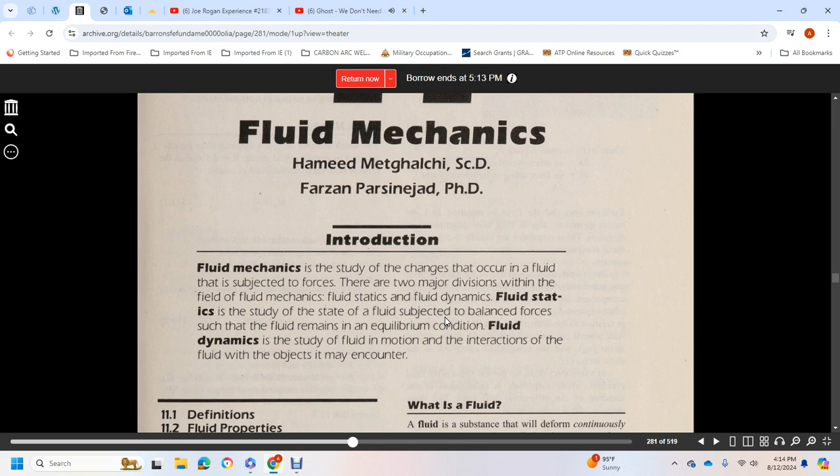Fluid mechanics is the study of changes that occur in fluid subject to forces. There are two major divisions within the field of fluid mechanics: fluid statics and fluid dynamics. Fluid statics is the state of fluid subject to balanced forces such that the fluid remains in equilibrium. Fluid dynamics is the study of the motion and interactions of fluid with objects it may encounter.

Definitions covered include fluid properties, fluid statics, fluid dynamics, internal flow, external flow devices, fluid measurement, dimensional analysis, dimensional homogeneity, similitude, and a summary. As with any other field of study, fluid mechanics has a vocabulary and terms that must be understood before the basic principles are introduced.

What is a fluid? A fluid deforms constantly when shear stress is applied, no matter how small the shear stress is. A fluid is a substance in either the liquid form or the vapor phase.

Control volume: all principles of fluid mechanics define the relation with the control volume, an imaginary region in space defined by boundaries, stationary or moving, across which material may cross. The boundaries of the control volume are completely arbitrary, and when possible, they are chosen in a way that simplifies the analysis.

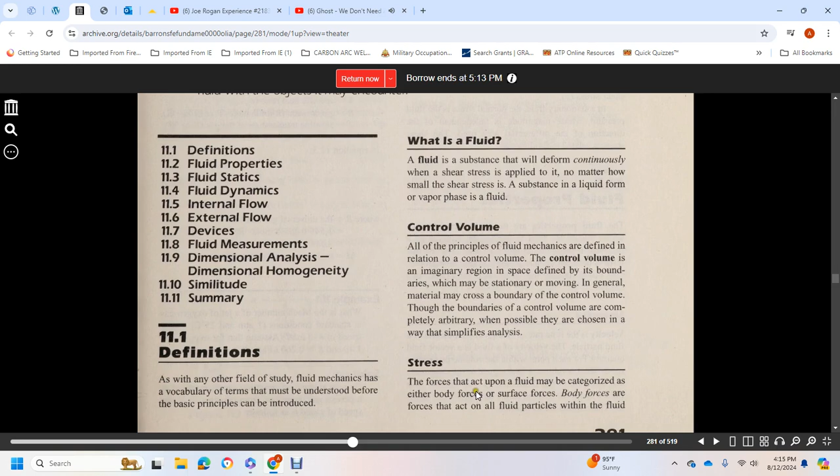Stress: the forces that act upon a fluid may be categorized are either body forces or surface forces. Body forces act on all fluid within the fluid and occur without physical contact, including electromagnetic and gravitational forces. Surface forces are forces applied directly to the surface of the liquid through physical contact.

The total force per unit area acting on the fluid at any point in the volume is an important parameter given the name stress. Stress at point P is defined as the limit as delta A approaches zero of the resultant force acting on the infinitesimal area at point P, divided by that infinitesimal area.

Both area and force in this equation are vector quantities; they have magnitude and direction, expressed with three components with respect to the same coordinate system. In general, to describe the stress of a fluid at any point with respect to the coordinate system, nine components are required.

Stress is often expressed in terms of two vector components in relation to the differential area: the component normal or perpendicular to the area is the normal stress, and the component along the differential area is the shear stress. In a stationary fluid, the normal stress is the fluid pressure, with magnitude independent of the direction of the differential area, while shear stress is related to fluid motion.

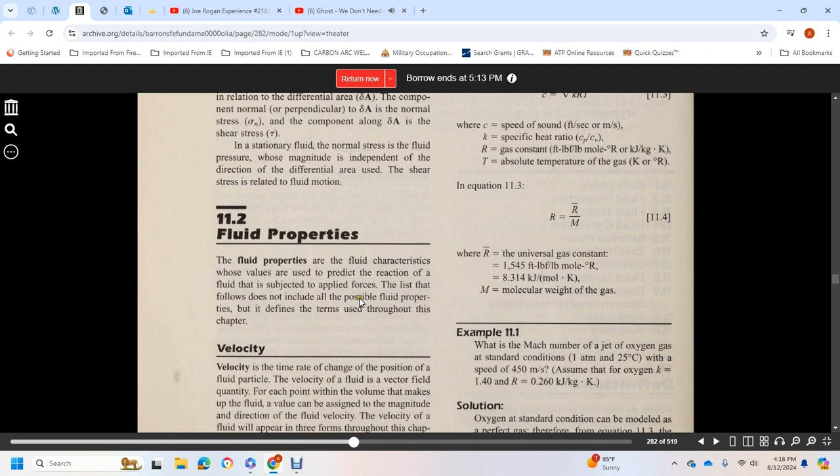Section 11.2, Fluid Properties. Fluid properties are fluid characteristics whose values are predictive of the reaction of the fluid subject to applied forces. The following list does not include all possible fluid properties, but defines the terms used throughout this chapter.

Velocity is the time rate of change of the position of a fluid particle. The velocity of the fluid is a vector field quantity, assigned at each point within the volume of fluid, with magnitude and direction of the fluid velocity. The velocity of the fluid will appear in three forms throughout the chapter.

These forms are as follows: velocity, the vector quantity of fluid velocity given at a point of the fluid, having both magnitude and direction; speed, the magnitude of the velocity vector given at a point of the fluid; and average speed, V, the average fluid speed through the surface of the control volume.

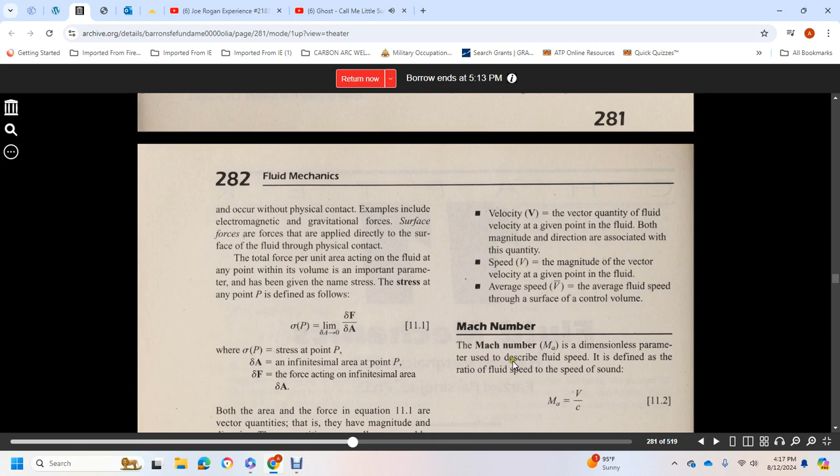The Mach number is a dimensionless parameter that describes fluid speed, defined as the ratio of fluid speed to the speed of sound. Mach number equals the fluid speed in feet per second or meters per second, divided by the speed of sound in feet per second or meters per second.

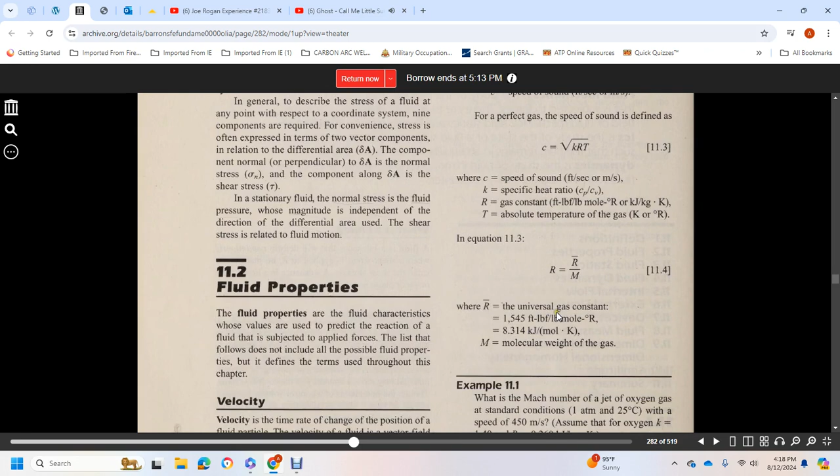The speed of sound for a perfect gas is defined as the square root of the specific heat ratio times the gas constant times the absolute temperature of the gas. In this equation, R is equal to the universal gas constant divided by the molecular weight of the gas.

Acceleration is defined, and it shows acceleration as the time rate of change of velocity of a fluid particle. Acceleration is also a vector fluid quantity and can change with either magnitude or direction of velocity.

There are two reference values of pressure. The gauge pressure is defined by reference to atmospheric pressure, while the absolute pressure is defined by reference to zero pressure. The two values are related by the equation: absolute pressure equals gauge pressure plus atmospheric pressure.

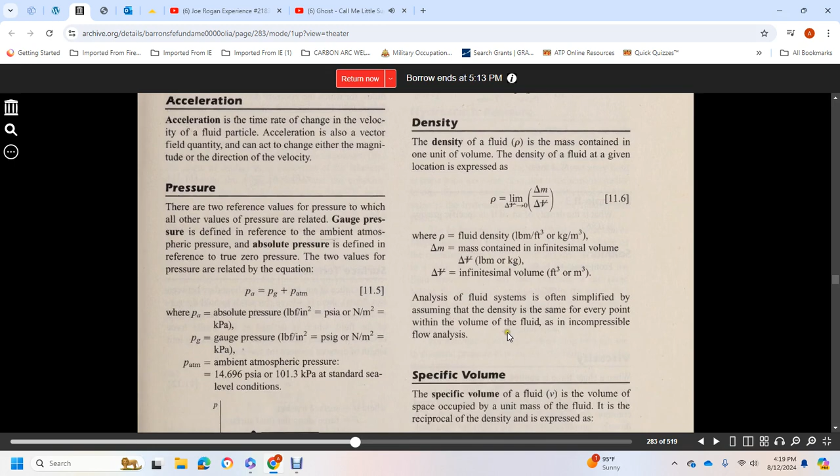Density is the mass contained within one unit volume of the fluid. Fluid density is given as the limiting value of mass per unit volume as the volume approaches zero, in units of pounds per cubic foot or kilograms per cubic meter. When analyzing a fluid system, it is often assumed that density is the same at every point within the volume, as in incompressible flow analysis.

Specific volume of a fluid is the volume of space occupied by a unit mass of the fluid. It is the reciprocal of the density: specific volume equals 1 over density (rho).

Specific weight is defined as the weight of a unit volume of the fluid, related to density. Specific weight equals density times the acceleration due to gravity, at sea level.

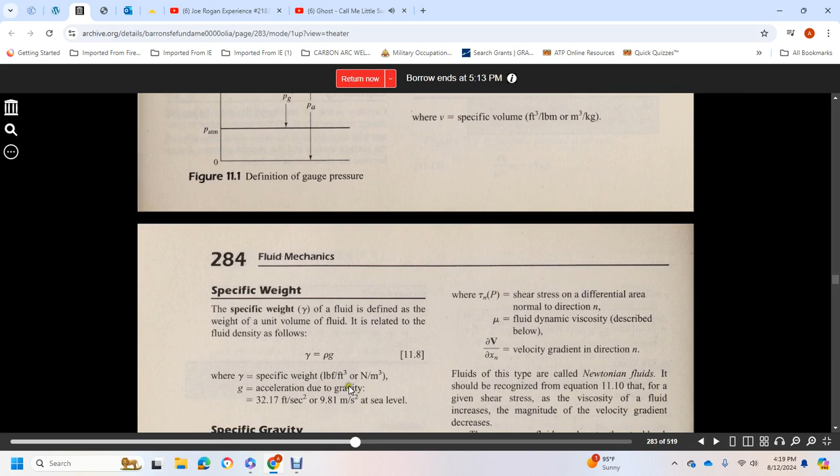Specific gravity is a dimensionless expression of the density of a fluid, defined as the ratio of fluid density to the density of water at 4 degrees Celsius. Specific gravity equals the density of the fluid over the density of water, and is also equal to the specific weight of the fluid over the specific weight of water.

Viscosity: when a shear force is applied, fluid motion will occur, with the magnitude of fluid velocity related to the magnitude of shear stress for most common fluids. The shear stress within the fluid is directly proportional to the velocity gradient. Viscosity is the name given to this proportionality constant.

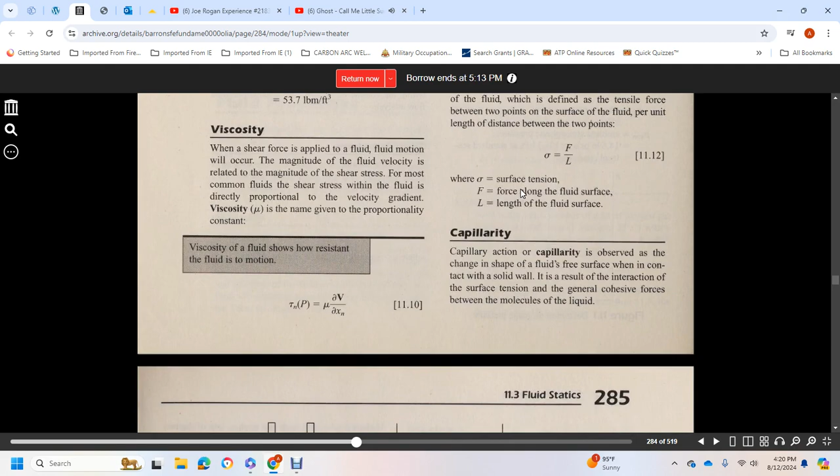Viscosity shows how resistant a fluid is to motion. Shear stress, the differential over the normal direction, is equal to the fluid's dynamic viscosity times the velocity gradient in the normal direction n.

Fluids that follow this relationship are called Newtonian fluids, and this should be recognized per equation 11-10: for a given shear stress, the viscosity of the fluid increases as the magnitude of the velocity gradient decreases.

There are many fluids such as toothpaste, blood that cannot be classified as Newtonian fluids. For many non-Newtonian fluids, the shear stress is related to the velocity gradient by a power law relationship. Two examples of such non-Newtonian fluids are pseudoplastic fluids, for which viscosity decreases as the velocity gradient increases, and dilatant fluids, for which viscosity also increases as the velocity gradient increases, following the power law for non-Newtonian fluids.

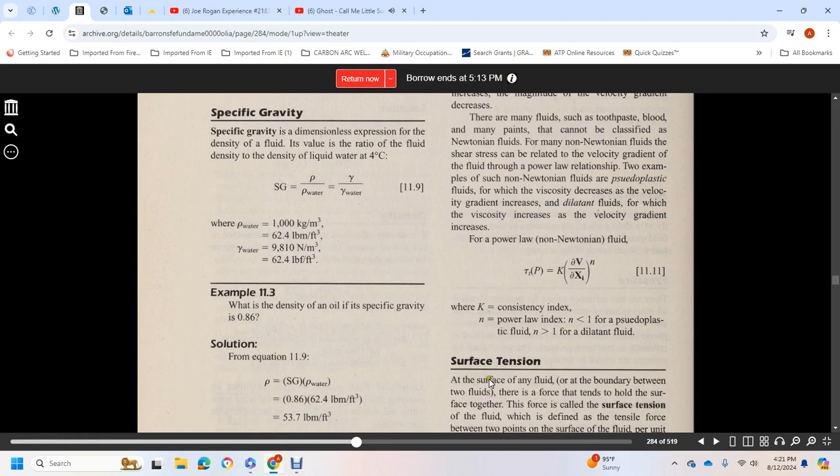The shear stress differential in the normal direction is equal to K, the consistency index, times velocity gradient raised to the nth power.

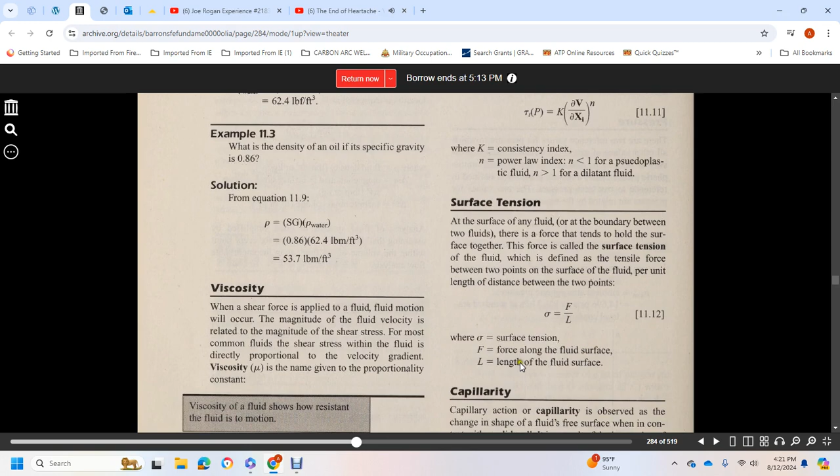Surface tension: at the free surface of a fluid, or at a boundary between two fluids, there is a force that tends to hold the surface together. This force is called surface tension, defined as the tensile force between two points on the fluid surface per unit length over the distance between those two points. Surface tension equals the force along the fluid surface over the length of the fluid surface.

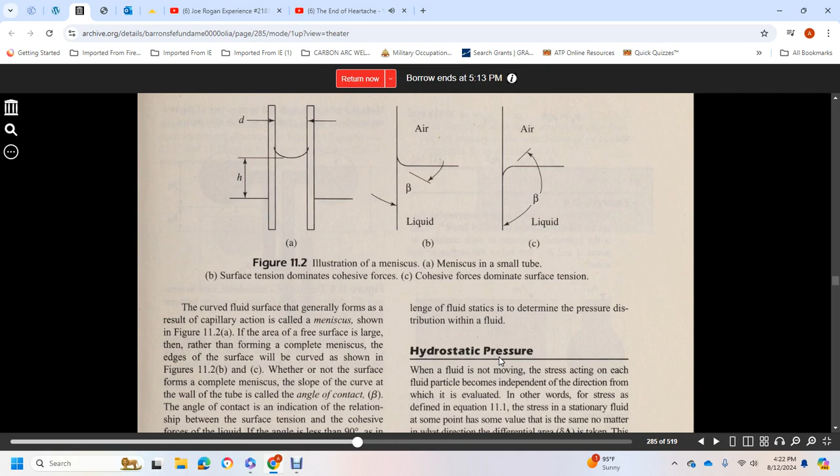Capillary action, or capillarity, is observed as a change in the shape of a fluid's free surface in contact with a solid wall. It results from the interaction of surface tension with the cohesive forces between the molecules of the liquid. The curved fluid surface that generally forms as a result of capillary action is called a meniscus, shown in figure 11.2a. Where the area of the free surface is larger, rather than forming a complete meniscus, the edge of the surface will curve, as shown in figure 11.2b and c. Whether or not a complete meniscus forms, the slope of the curve at the wall of the tube is described by the contact angle.

Contact angle indicates the relationship between surface tension and cohesion force of the liquid. With angle less than 90 degrees, as in figure 11.2b, surface tension is stronger than cohesion forces. With angle greater than 90 degrees, as in figure 11.2c, cohesive forces are stronger than surface tension.

When a small diameter tube is placed in fluid where surface tension is stronger than the molecular cohesive force, the fluid level inside the tube will rise a certain distance, as shown in figure 11.2a.

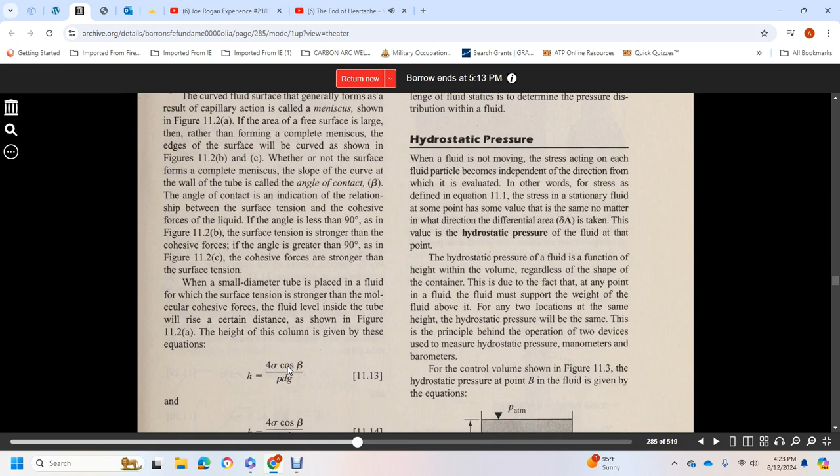The height of the column is given by the equation: height equals 4 times sigma over gamma times D, with H and D as variables.

Section 11.3, Fluid statics. Fluid static is a state of a fluid system with no fluid motion and no shear stress. The primary challenge in fluid statics is to determine the pressure distribution within the fluid.

Hydrostatic pressure: when fluid is not moving, the stress acting on each fluid particle becomes independent of direction, which is called the hydrostatic pressure. This stress is defined in equation 11.1 as stationary fluid pressure at the same point having the same value no matter what direction the differential area is taken.

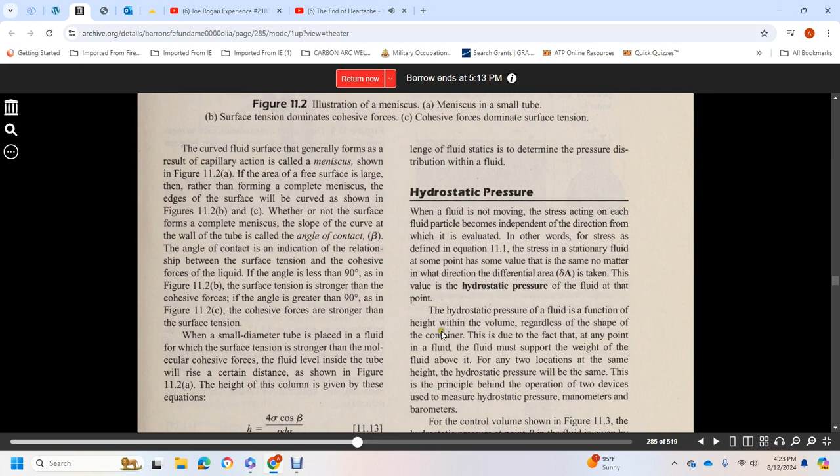The value of the hydrostatic pressure of the fluid at a point is a function of the height of fluid, regardless of the shape of the container, due to the fact that any point in the fluid must support the weight of the fluid above it.

For any two locations at the same height, the hydrostatic pressure will be the same. This is the principle behind the operation of two devices using hydrostatic pressure: manometers and barometers.

For the control volume shown in figure 11.3, the hydrostatic pressure at point B of the fluid is given by these equations.

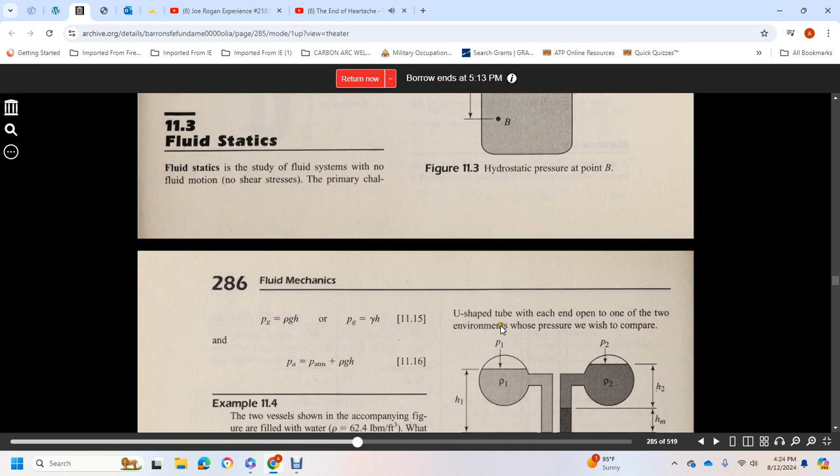The manometer, illustrated in figure 11.4, is a device used to measure pressure difference. It is constructed U-shaped with each end open to the two environments whose pressures we want to compare. The difference in pressure between the two environments is related to the difference in height between the two legs of the manometer, as follows.

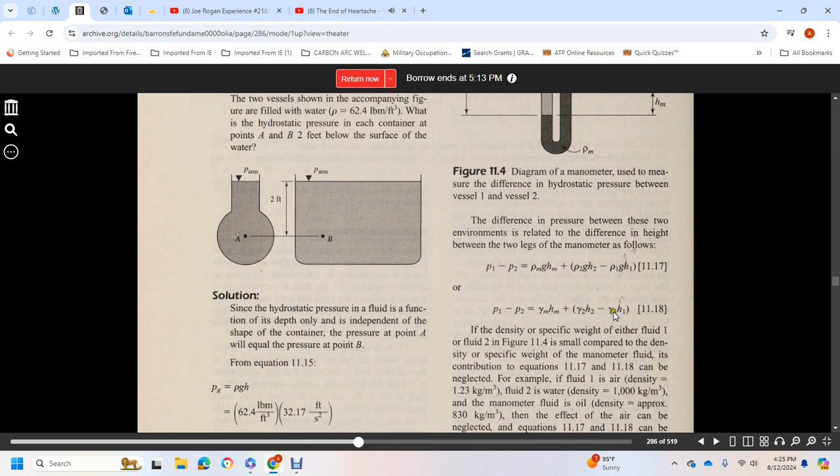If the density or specific weight of either fluid 1 or fluid 2 in figure 11.4 is small compared with the density or specific weight of the manometer fluid, the contribution of that term in equations 11.17 and 11.18 can be neglected.

For example, if fluid 1 is air with density 1.23 kilograms per meter cubed, fluid 2 is water with density 1,000 kilograms per meter cubed, and the manometer fluid is oil with density approximately 830 kilograms per meter cubed, the effect of the air can be neglected, and equations 11.17 and 11.18 can be reduced.

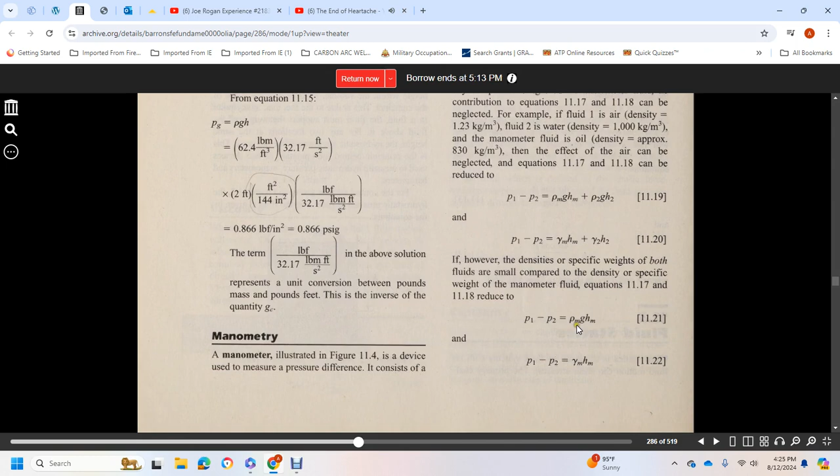If the density or specific weights of both fluids are small compared to the density or specific weight of the manometer fluid, equations 11.17 and 11.18 reduce to P1 minus P2 equals rho_M g H_M, and P1 minus P2 equals gamma_M H_M, with one end of the manometer exposed directly to the atmosphere, making it an open manometer.

This is illustrated in figure 11.5, and equations 11.17 and 11.18 apply to the open manometer, where pressure 1 is related to atmospheric pressure.

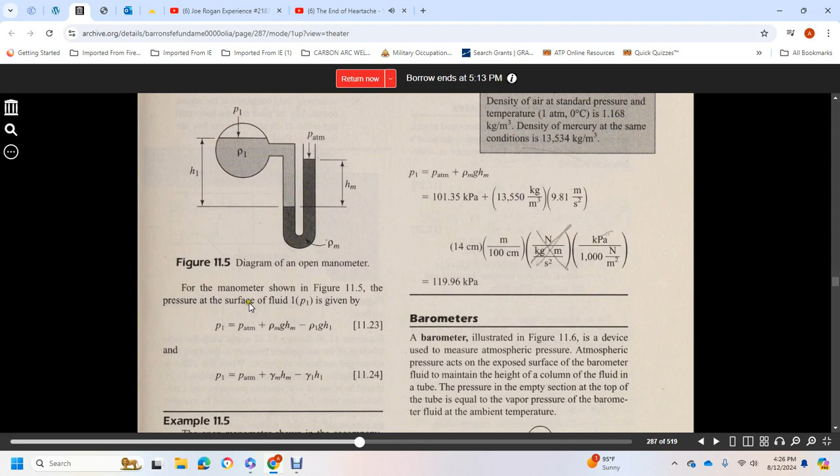For the manometer shown in figure 11.5, with the pressure on the surface of the liquid, P1 is given. We then consider the density of air at standard pressure and temperature, 1 atm at 0 degrees Celsius, which is 1.168 kilograms per meter cubed, and the density of mercury at the same condition.

13,534 kilograms per meter cubed. Barometers: the barometer, illustrated in figure 11.6, is a device used to measure atmospheric pressure.

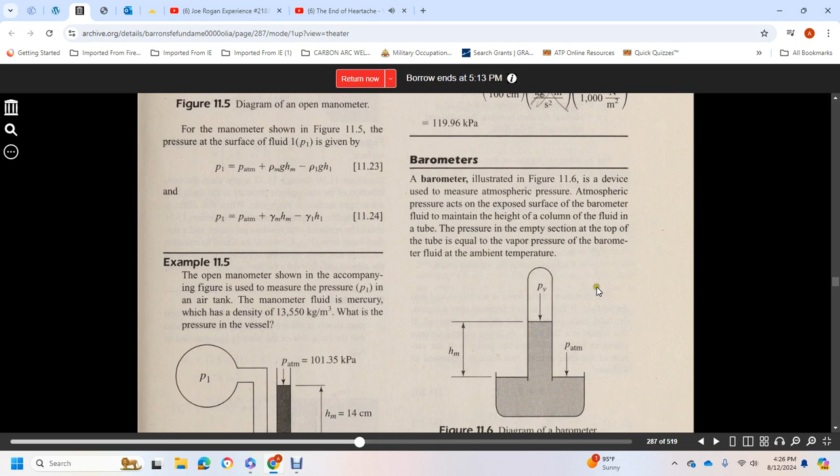The atmospheric pressure acts on the exposed surface of the barometer fluid, maintaining the height of the fluid column in the tube. The pressure in the empty section at the top of the tube is equal to the vapor pressure of the barometer fluid at ambient temperature.

The height of the fluid column related to the atmospheric pressure is given by: atmospheric pressure minus vapor pressure equals gamma H_M, where PV is the vapor pressure of the barometer fluid. With the ambient temperature, the vapor pressure of the barometer fluid is usually chosen close to 0.

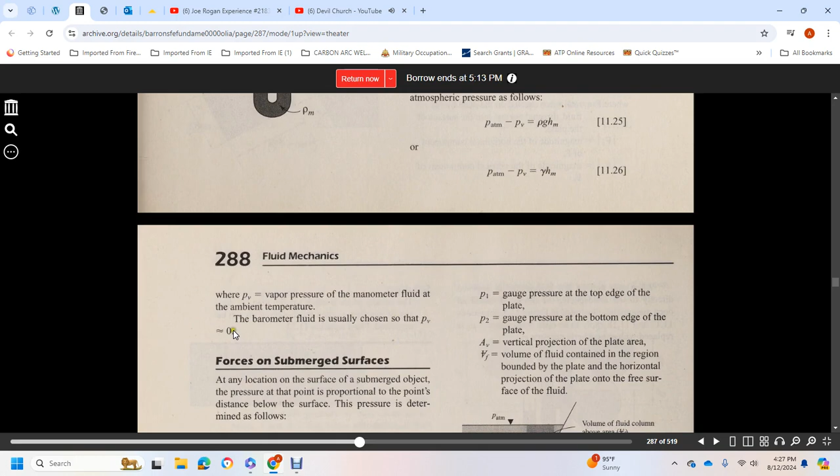Forces on submerged surfaces: at any location on the surface of a submerged object, the pressure at a point is proportional to the distance from the surface, with pressure determined as P equals P0 plus rho g times that distance.

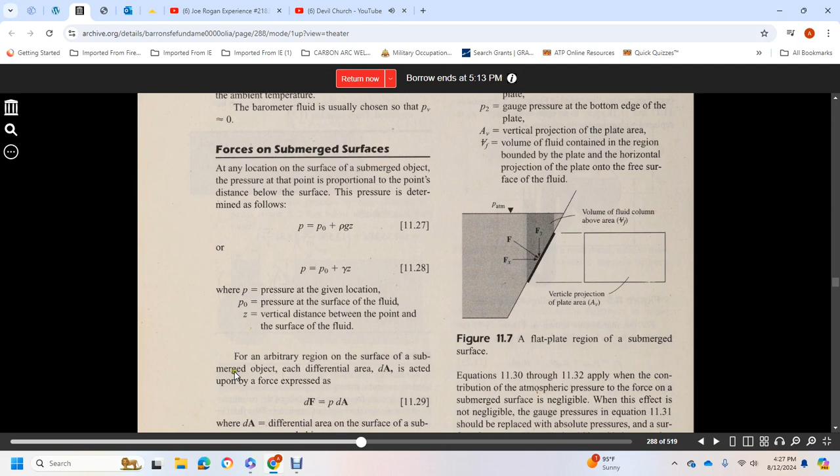The force acting on the differential area of the submerged object is equal to the fluid pressure at the location of that differential surface area. The direction of the force is normal to the surface, integrated over the region, gives the total force acting over the region, as shown for a flat plate control volume in Figure 11.7.

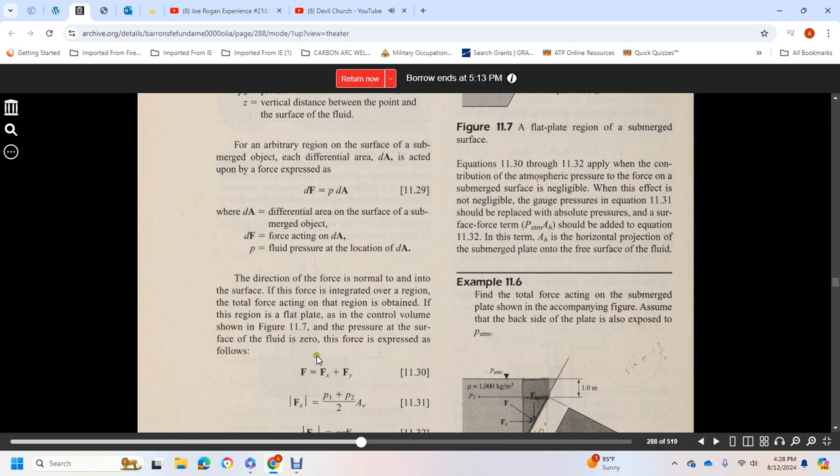Equations 11.30 and 11.32 apply when the contribution of atmospheric pressure forces on the submerged surface is negligible. If the effect is not negligible, the gauge pressure in equation 11.31 should be replaced with absolute pressure, and an atmospheric surface force term should be added to equation 11.32.

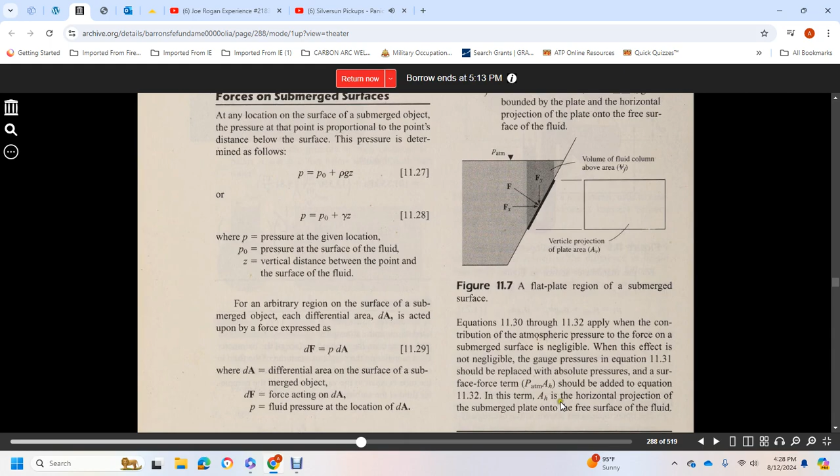The term A H is the horizontal projection of the submerged plate relative to the free surface of the fluid, and it factors into the solution. Note that the pressure increases linearly with depth.

The center of pressure is the location on the surface of a submerged rigid body where the concentrated point force F, from the preceding section, has the same effect as the distributed pressure force over the entire region. These definitions are illustrated in Figure 11.8.

The coordinates of the center of pressure relative to the centroid of the submerged area, Y and Z, are given by the following equations. Y is equal to the moment of the area about the axis parallel to the y-axis passing through the centroid of the area.

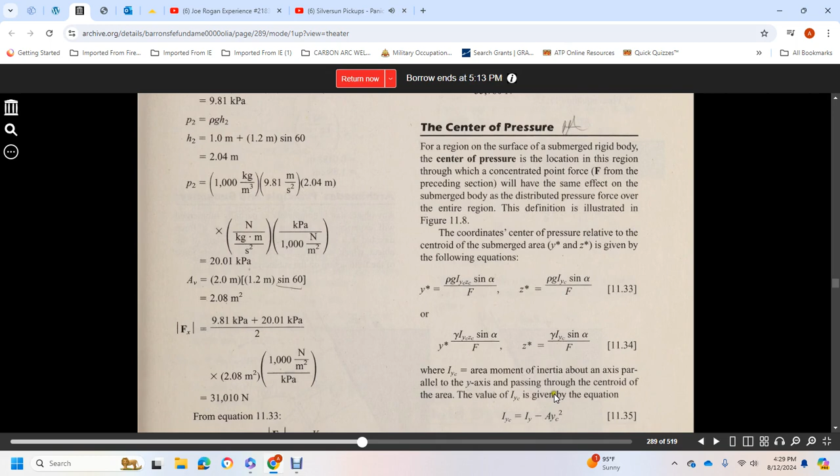The value Iyc is given by the parallel axis theorem in equations 11.33 and 11.34, representing the area product with the axis parallel to the y and z axes passing through the centroid of the area.

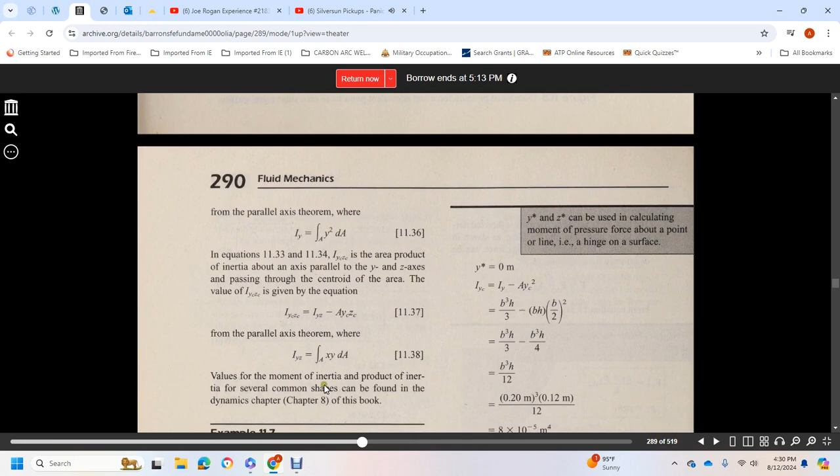The moment of area about an axis parallel to it, given by the parallel axis theorem, along with moments of inertia for several common shapes, can be found in the dynamics chapter, chapter 8, of this book. The text then proceeds into examples.

Y and Z can be used to compute the moment of the pressure force about a point or a line hinge on a surface.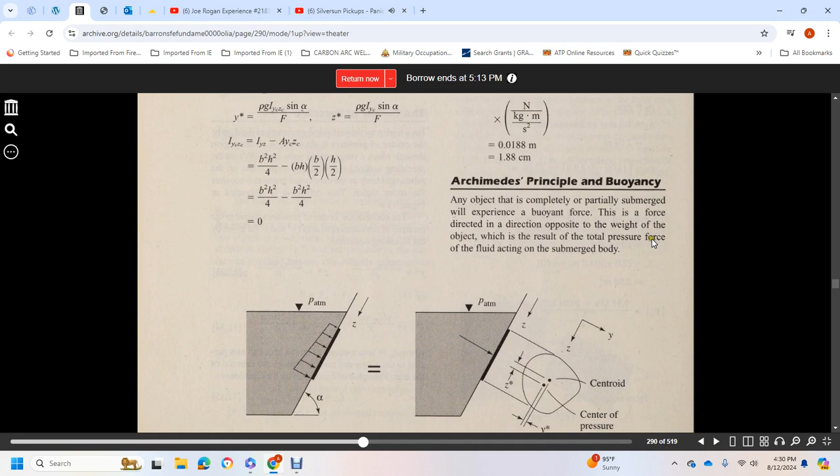Archimedes' principle of buoyancy states that any object completely or partially submerged will experience a buoyancy force, directed opposite to the weight of the object, which results from the total pressure force of the fluid acting on the submerged body. According to Archimedes' principle, the magnitude of the buoyancy force is equal to the weight of the fluid displaced by the object.

If the object is floating on the surface of the liquid, it will displace a volume of fluid with the same weight as the object.

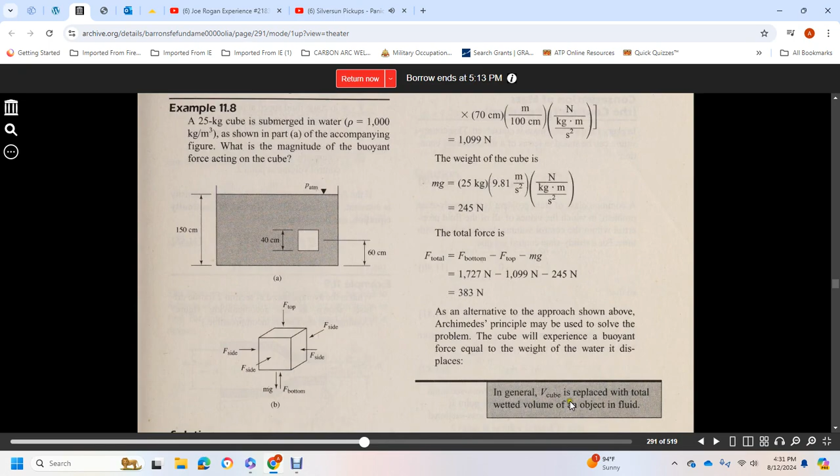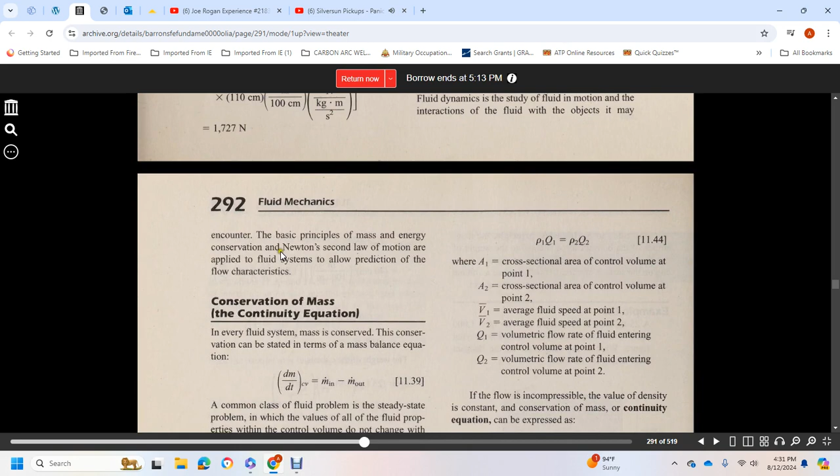Section 11.4: Fluid Dynamics. Fluid dynamics is the study of fluid motion as it interacts with objects it may encounter, based on the principles of mass and energy conservation. Newton's second law of motion applied to fluid systems allows for the prediction of fluid characteristics.

Conservation of mass and the continuity equation: for every fluid system, mass is conserved, and this conservation is stated in terms of the mass equation as dm over dt of the control volume equals mass in minus mass out.

A common class of fluid problems involves steady state conditions, where values of fluid properties within the control volume do not change over time.

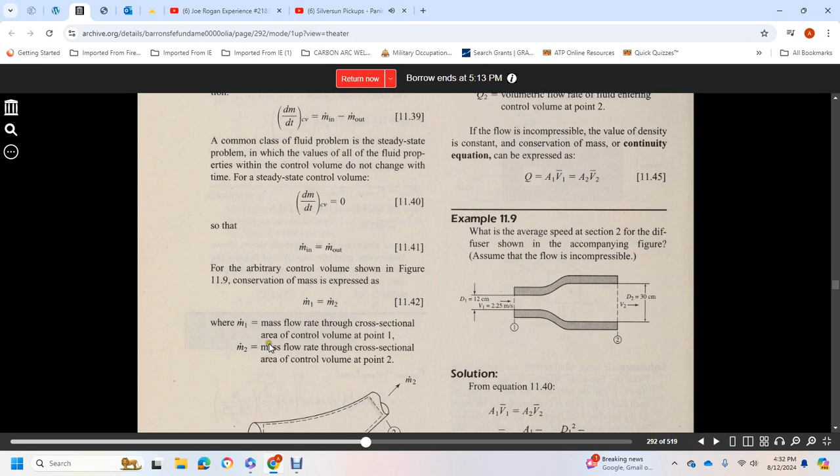Mass over time for the control volume is equal to 0, so mass in equals mass out. For the arbitrary control volume shown in figure 11.9, conservation of mass gives mass 1 equal to mass 2, where mass 1 is the mass flow rate at the cross-sectional area of control volume point 1, and mass 2 is the mass flow rate at the cross-sectional area of control volume point 2.

Equivalent expressions from equation 11.42 show rho1 A1 V1 equal to rho2 A2 V2, where A1 is the cross-sectional area, and rho1 Q1 equal to rho2 Q2. A1 is the cross-sectional area of control volume point 1, A2 is the cross-sectional area of control volume point 2, V1 is the average fluid speed at point 1, V2 is the average fluid speed at point 2, and Q1, Q2 are the volumetric flow rates of the fluid entering points 1 and 2.

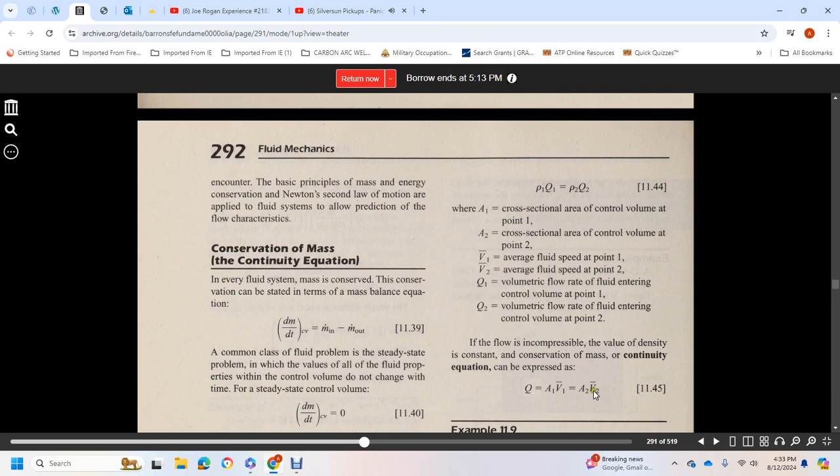The impulse momentum principle: Newton's second law, force equals mass times acceleration, can be applied to fluid systems with the principle known as the impulse momentum principle.

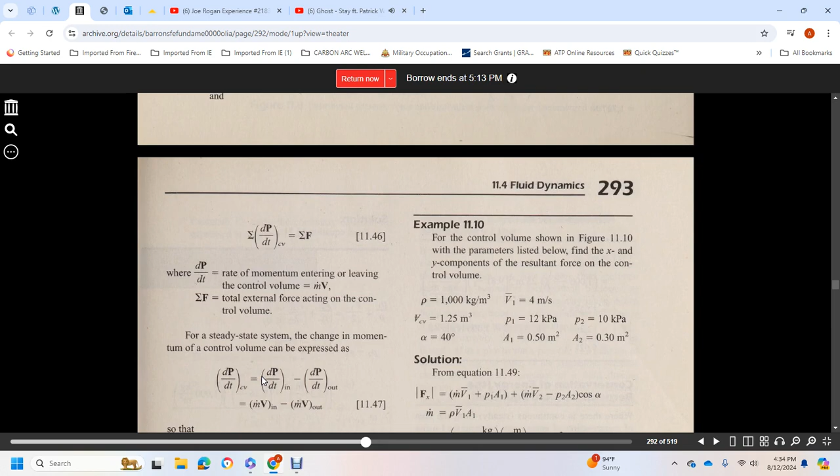The principle is expressed mathematically for a control volume as follows: the rate of momentum entering and leaving the control volume is equal to the mass of the control volume times velocity, which equals the total external force acting on the control volume. The rate of change of momentum of the control volume can be expressed as dp over dt for the control volume, equal to dp in minus dp out. Therefore, the force equals mass times velocity in minus mass times velocity out.

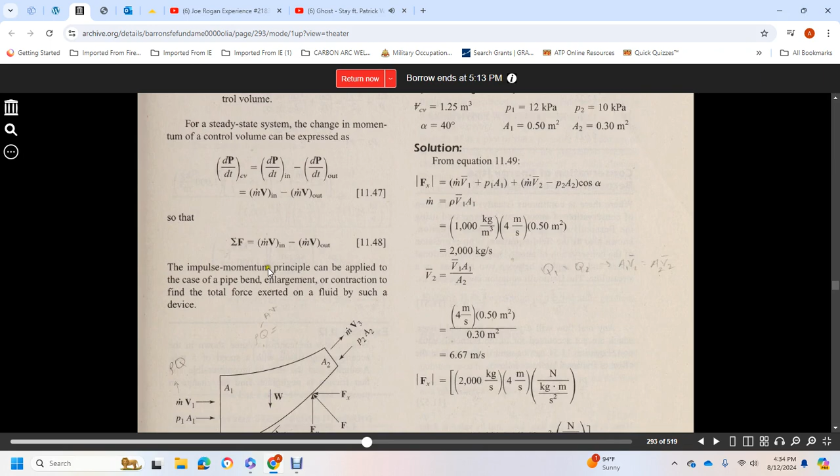The impulse momentum principle can be applied in cases of pipe bending, enlargement, and contraction, for finding the total force exerted on a fluid by such a device. From figure 11.10, the free body diagram of fluid in a general pipe bend, enlargement, or contraction shows that equation 11.46 can be applied to the control volume described in figure 11.10 to produce these equations. These relationships are valid for both compressible and incompressible flow.

The absolute value of Fx is equal to mass times velocity 1 plus pressure 1 times area 1, plus mass times velocity 2, mass velocity 2 minus pressure 2 times area 2, times cosine of angle alpha. The absolute force Fy is equal to W minus mass velocity 2 minus pressure 2 times area 2, times sine of angle alpha.

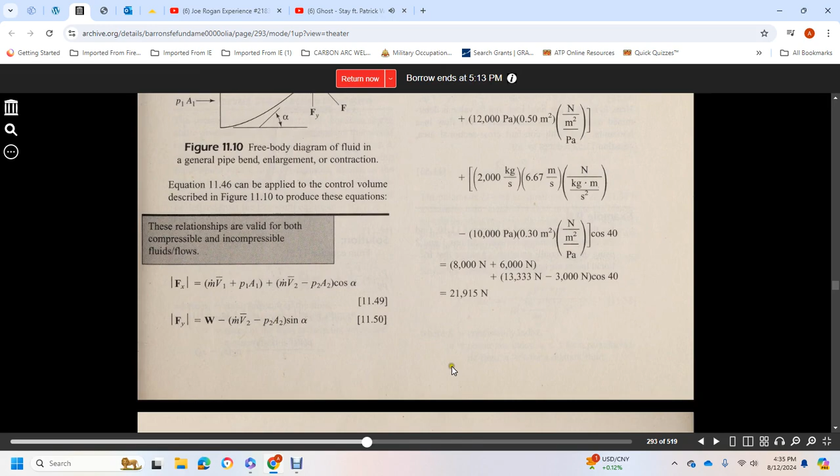And then it goes into an example solution.

Conservation of energy for the Bernoulli fluid equation: for continuous, steady, ideal flow, the conservation of energy is expressed using the Bernoulli equation, also known as the field equation. This expression of conservation of energy, neglecting frictional loss, applies between two sections on the streamline.

The Bernoulli equation is expressed as: pressure 1 over specific weight, plus velocity 1 squared over 2g, plus elevation z1, equals pressure 2 over specific weight, plus velocity 2 squared over 2g, plus elevation z2.

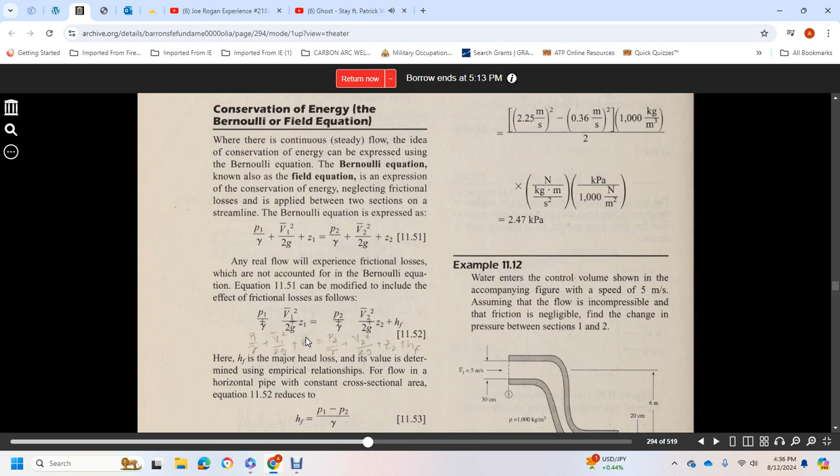With real flow, there will be frictional loss, so the Bernoulli equation 11.51 can be modified to include the effect of frictional loss. Here HF is the major head loss, determined empirically by the relation for flow in a horizontal pipe of constant cross-sectional area. Equation 11.52 reduces so that the major head loss equals pressure 1 minus pressure 2, over specific weight gamma.

And it goes into solutions and examples.

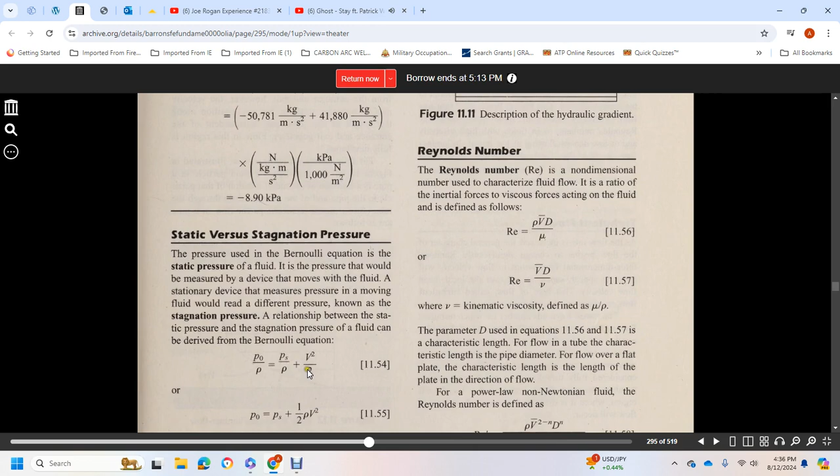The relation between the static pressure and the stagnation pressure of the fluid can be defined by the Bernoulli equation: P0 over density equals PS over density plus V squared over 2. Or, P0, the stagnation pressure, is equal to the static pressure of the fluid plus one half times the density of the fluid times the speed of the fluid at the point where the measurement is taken, squared.

Grade line, hydraulic gradient, energy line: if the pipe is fitted with tubes as an open manometer along its length, the static pressure location can be visualized, with the pressure at successive locations being lower as shown in figure 11.11. The line drawn through the meniscus of the manometers is called the hydraulic grade line.

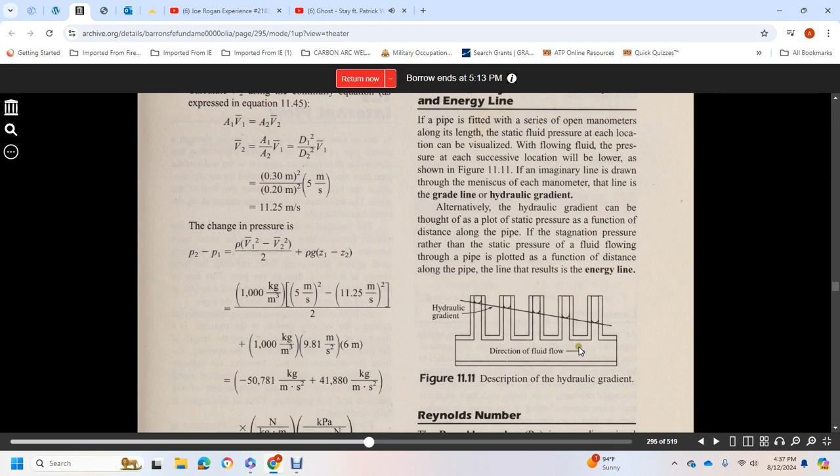Alternatively, the hydraulic gradient can be thought of as a plot of the static pressure as a function of distance along the pipe. The stagnation pressure, rather than the static pressure, of the fluid flowing through the pipe, plotted as a function of distance along the pipeline, gives the resultant energy line, which shows the hydraulic gradient direction of the fluid. Description of hydraulic gradient and Reynolds number follows.

Reynolds number (Re) is a non-dimensional number that characterizes fluid flow as the ratio of inertial forces to viscous forces acting on the fluid. Reynolds number is defined as the density of the fluid times the speed of the fluid times D over mu, or equivalently V times D over nu, where nu is the kinematic viscosity defined as mu over rho.

The parameter D is given in equations 1156 and 1157. The characteristic length for flow in a tube is the pipe diameter, for flow over a flat plate it is the characteristic length of the plate in the direction of flow, and for a power-law non-Newtonian fluid it is defined similarly.

For a power-law non-Newtonian fluid, the Reynolds number is defined as density times velocity to the 2 minus n power, times D to the n power, over the consistency index, times (3n+1)/(4n), raised to the n, times 8 to the n minus 1.

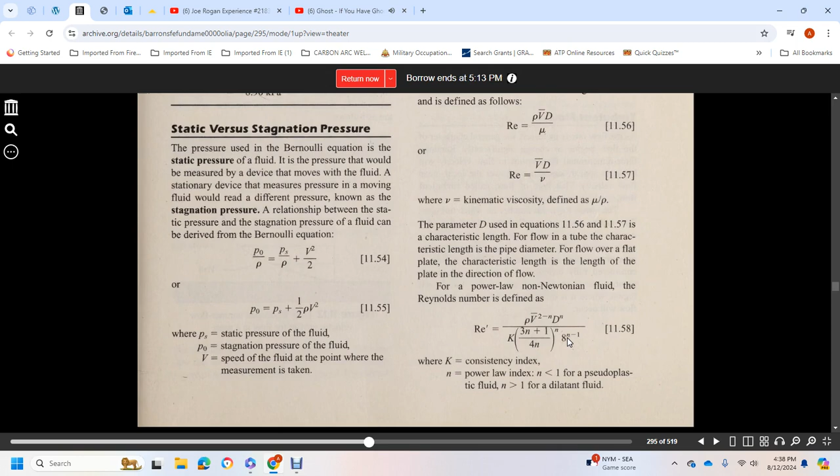Laminar flow: a fluid flow begins from rest, a flow of fluid with highly organized streamlines, smooth and continuous, with fluid particle motion parallel to the mean of the bulk flow. This type of flow generally occurs at Reynolds numbers below a certain threshold, for fluids with high viscosity and low density flowing at low speed.

In laminar flow, the fluid can be thought of as a collection of fluid layers. Each layer of fluid particles moves at the same velocity, and there is no macroscopic mixing between fluid layers.

Turbulent flow: as flow rate increases, the general character of the flow begins to show significant random three-dimensional fluctuations. The fluid flow velocity begins to show fluctuations superimposed over the local mean flow velocity. This type of turbulent flow results in significant fluid mixing.

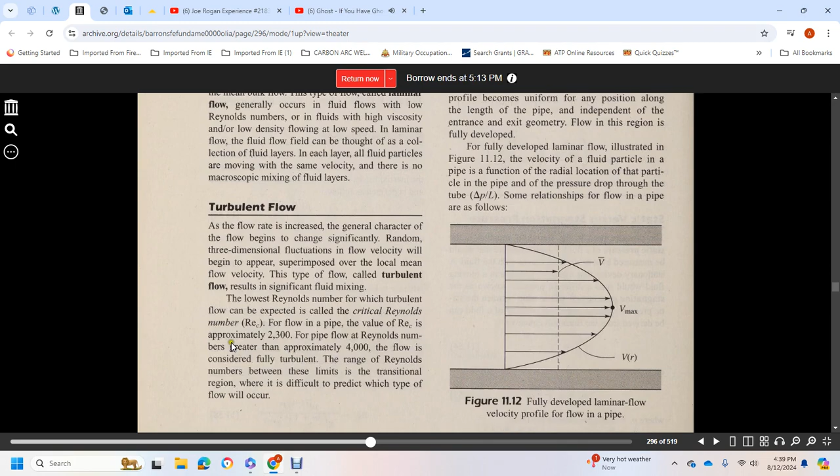The lowest Reynolds number at which turbulent flow can occur is expressed as the critical Reynolds number, or Re_c. For pipe flow, the critical Reynolds number value is approximately 2300. For pipe flow with Reynolds number greater than approximately 4000, the flow is considered fully turbulent. The range of Reynolds numbers between these limits is a transitional region where it is difficult to predict which type of flow will occur.

Section 11.5, Internal Flow. In this section we consider flow through a closed pipe or duct. Experimental observation shows that fluid particles adjacent to the wall of the pipe have zero velocity; this is called the no-slip condition.

With no fluid slipping against the wall of the pipe, the maximum fluid velocity occurs along the centerline of the pipe. The variation in fluid velocity is caused by the viscosity of the fluid and the shear forces between fluid particles. These shear forces perform work against the moving fluid, reducing the fluid's energy as it travels through the pipe.

The loss of energy due to friction, often called the head loss, is observed as a drop in fluid pressure along the pipe.

As fluid enters or leaves the pipe, the internal velocity profile is a function of the fluid's location along the length of the passage and the geometry of the opening. Far from the entrance, however, the velocity profile becomes uniform at any position along the length of the pipe, independent of the entrance or exit geometry. The flow in this region is called fully developed flow.

Fully developed laminar flow is illustrated in Figure 11.12. The velocity of a fluid particle in the pipe is a function of its radial location, and the pressure drop through the pipe results from the pressure gradient over the length of the pipe.

Some of the relationships describing the flow and pressure in laminar pipe flow follow.

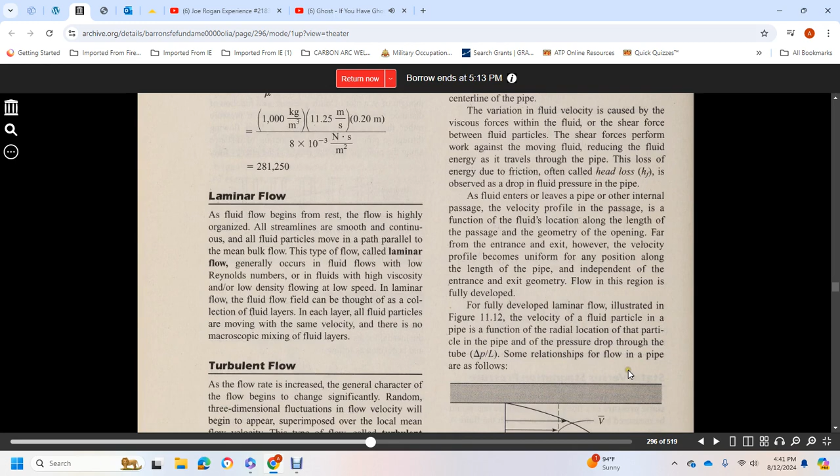The speed distribution V(R) is given in terms of the pressure gradient over the length and the radial position, involving the viscosity mu. The average speed is Q over A, related to the pressure drop over the length by a factor involving mu. There is also a maximum speed, a volumetric flow relation, and the shear stress distribution. Here R is the radial coordinate with origin at the centerline of the pipe, and R0 is the inside radius of the pipe.

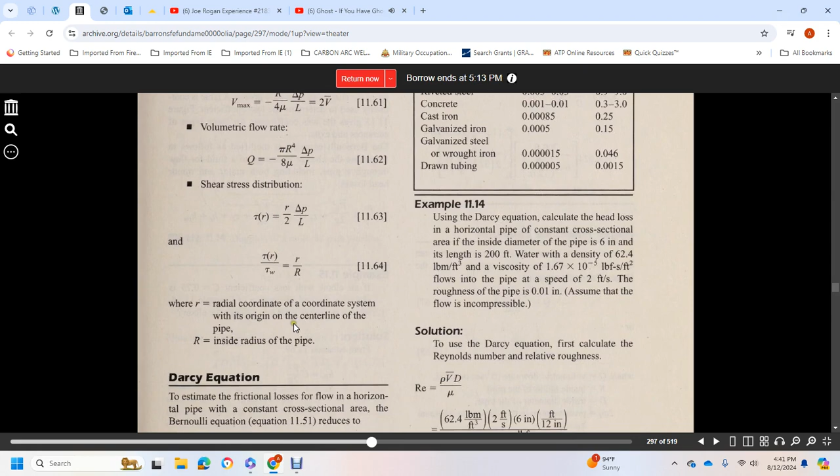The Darcy equation: to estimate the frictional loss in flow through a horizontal pipe of constant cross-sectional area, the Bernoulli equation is reduced so that pressure 1 minus pressure 2, divided by the specific weight, equals the static head plus the frictional head loss. The frictional head loss is estimated using the Darcy equation: head loss equals the friction factor times L over D, times velocity squared over 2g.

For laminar flow, the friction factor is 64 divided by the Reynolds number. For transitional and turbulent flow, the friction factor can be found using the Moody diagram, a copy of which is included at the end of this chapter.

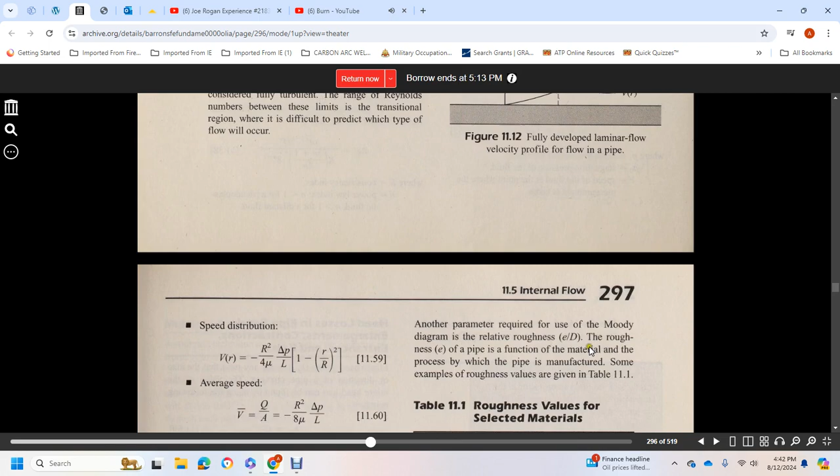Another parameter required with a Moody diagram relative to the roughness is E over D, the roughness of the pipe as a function of the material and process by which the pipe is manufactured. Some example roughness values are given in Table 11.1, and then it goes into an example solution.

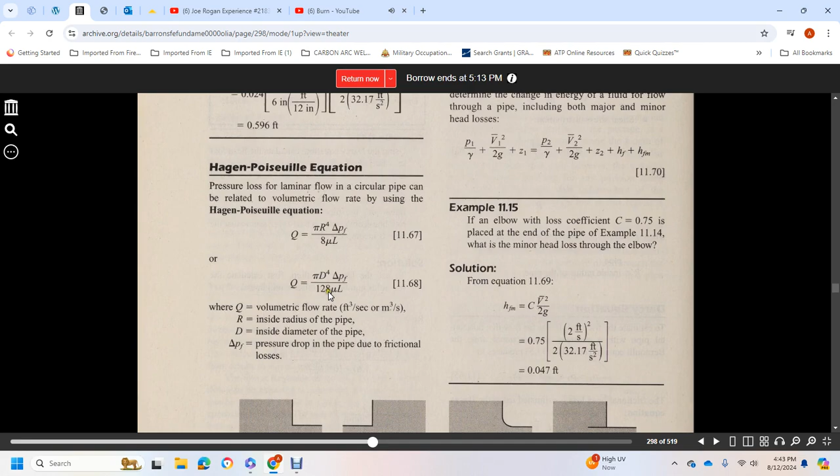Hagen-Poiseuille equation: the pressure loss of laminar flow in a circular pipe is related to the volumetric flow rate. Volumetric flow rate equals pi times the inside radius of the pipe to the fourth, times the resultant pressure drop in the pipe due to frictional losses, over 8 times mu times L. Alternatively, volumetric flow rate equals pi times the inside diameter of the pipe to the fourth, times the resultant pressure drop in the pipe due to frictional losses, times 1 over 128 times mu times L.

Head loss in pipe bends, enlargements, contractions, entrances and exits. Minor head losses occur any time there is a change in pipe direction, and they can be calculated as follows: minor head loss equals the loss coefficient times velocity squared over 2g, determined by the geometry change of the flow area. A table is commonly used to determine loss coefficients. Figure 11.13 gives the loss coefficient for some types of entrances and exits. The energy equation can then be used to determine the change in energy of fluid flowing through the pipe, including both major and minor losses.

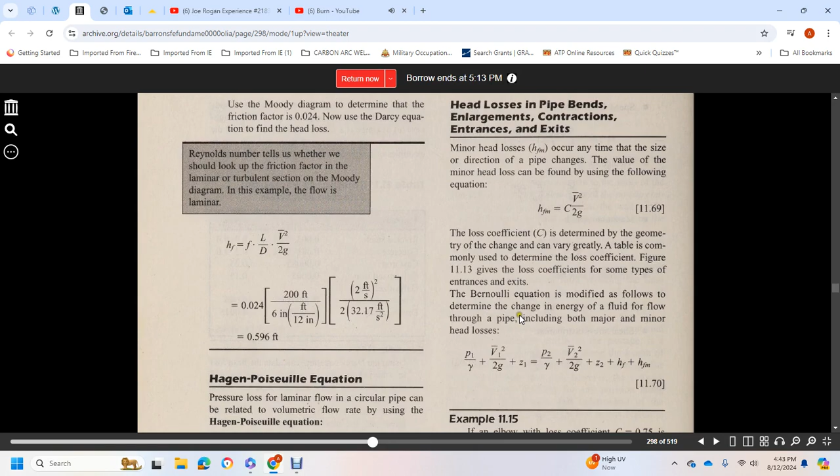Multi-path pipelines: a common technique used to increase the capacity of a pipe is to add another pipe in parallel. It's possible to predict how much fluid will flow through each path. The fluid pressure before each branch must be equal, so the flow divides itself such that the head loss through each path is equal, as shown in the multiple pipeline paths in Figure 11.14. Head loss total equals head loss friction 1, equals head loss friction A, equals head loss friction B.

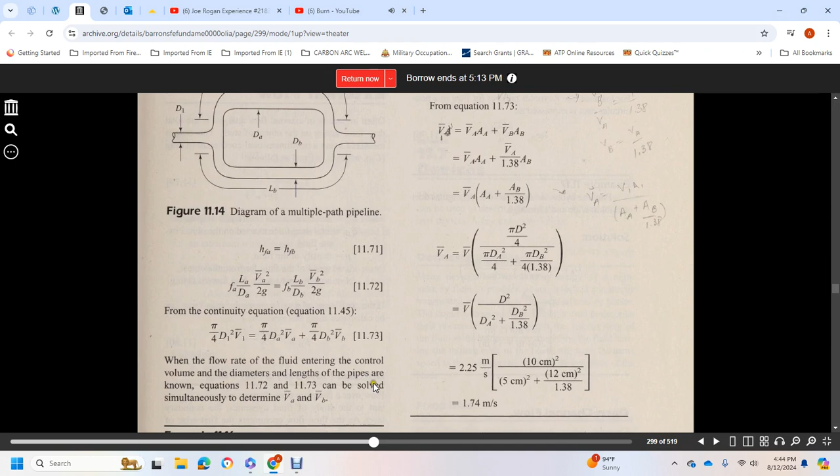For the continuity equation, when the flow rate of fluid entering the control volume, and the diameters and lengths of the pipes, are known, equations 11.72 and 11.73 can be solved simultaneously to determine velocities A and B. An example, 11.16, gives the solution. Flow rates in non-circular ducts.

Non-circular ducts can be analyzed with the same technique as round ducts, although it's necessary to replace the diameter with a new parameter called hydraulic radius or hydraulic diameter. The equations for these parameters are as follows: hydraulic radius equals cross-sectional area over wetted perimeter. Hydraulic diameter equals 4 times the cross-sectional area over the wetted perimeter.

Open channel flow: the relationships developed for flow inside a closed pipe, such as the Darcy friction factor, have been determined through experimental analysis of basic geometries. Fluid systems analyzed for open channel flow need a new empirical relation.

There is free surface flow described by the Manning equation and the Hazen-Williams equation. Manning's equation: velocity equals 1 over n, times the hydraulic radius to the 2/3 power, times the slope to the 1/2 power. Hazen-Williams equation: velocity equals 0.849 times the Hazen-Williams roughness coefficient, times the hydraulic radius of the channel to the 0.63 power, times the slope of the energy grade line to the 0.54 power.

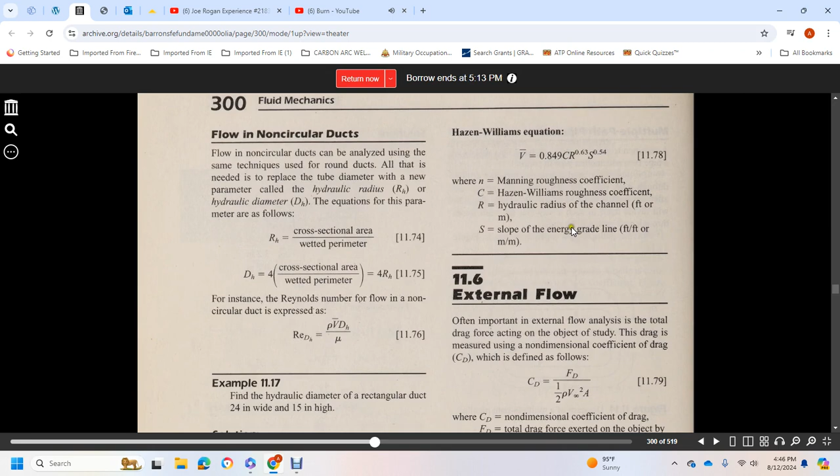Section 11.6, external flow. Often important in external flow analysis is the total drag force on an object, and the drag is measured with the non-dimensional drag coefficient. The drag coefficient equals the total drag force exerted on the object by the fluid, divided by one-half the density of the fluid times the speed of the fluid far from the object squared, times the area over which the drag force acts.

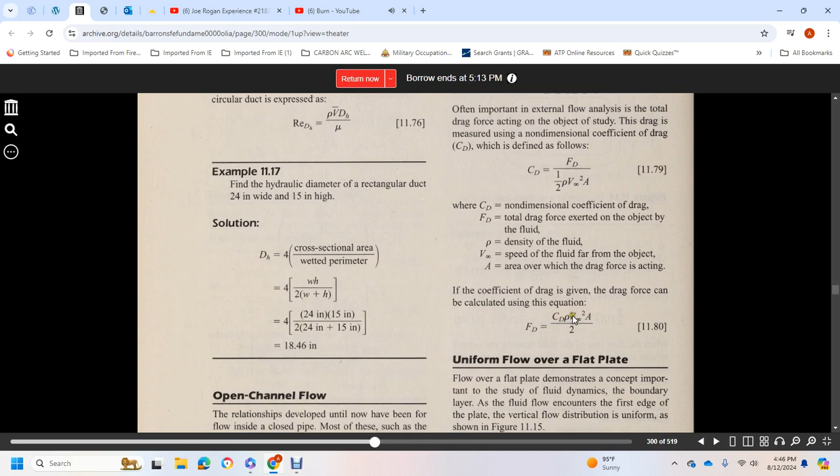The drag coefficient allows the drag force to be calculated as: total drag force exerted on the object by the fluid equals the non-dimensional drag coefficient times the density times the speed of the fluid squared, times the cross-sectional area, divided by 2.

Uniform flow over a flat plate. Flow over a flat plate demonstrates concepts important to the study of fluid dynamics. The boundary layer that the fluid flow first encounters is shown in the diagram of the plate, with the vertical flow distribution shown in Figure 11.15. As the fluid progresses along the plate, the vertical distance above the plate where the fluid speed reaches free stream velocity increases with distance, accounting for the growth of the boundary layer thickness.

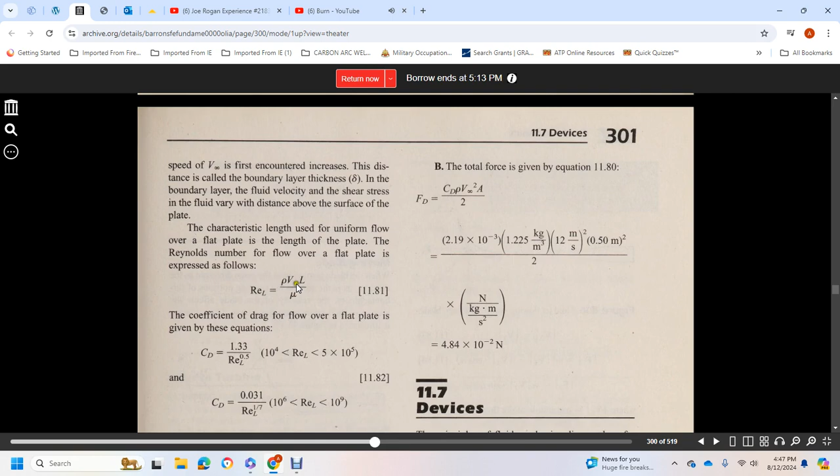Now we'll go to section 11.7, devices. The principles of fluid mechanics discussed so far can be used to describe the operation of industrial devices. For example, here are a few examples of deflector blades.

In many devices, the kinetic energy of high velocity fluid produces power, which is commonly transmitted through the curved surface of the blades, and the momentum principle is used to describe their operation. We neglect the viscous drag of the fluid on the blade surface, therefore the fluid leaving the trailing end of the blade will have the same speed as the fluid approaching the leading edge of the blade.

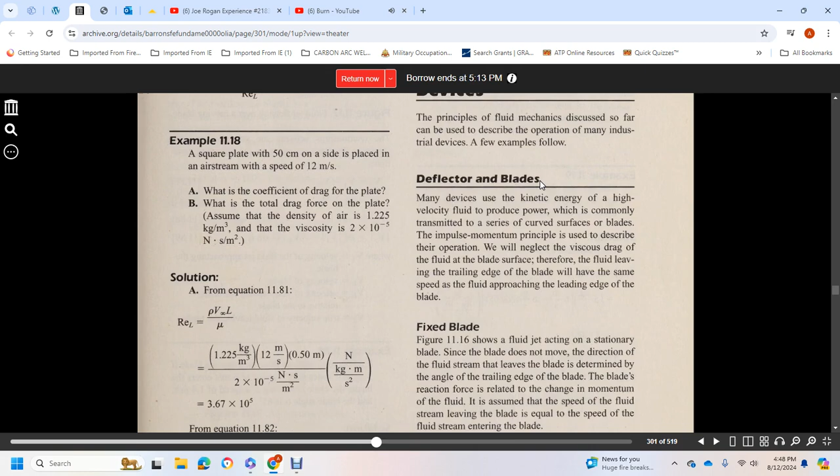For a fixed blade, the fluid jet acts on the stationary blade. Since the blade does not move, the direction of the fluid stream leaving the blade is determined by the angle of the trailing edge of the blade. The blade's reaction is related to the change of momentum of the fluid, assuming the speed of the fluid stream leaving the blade is equal to the speed of the fluid stream entering the blade.

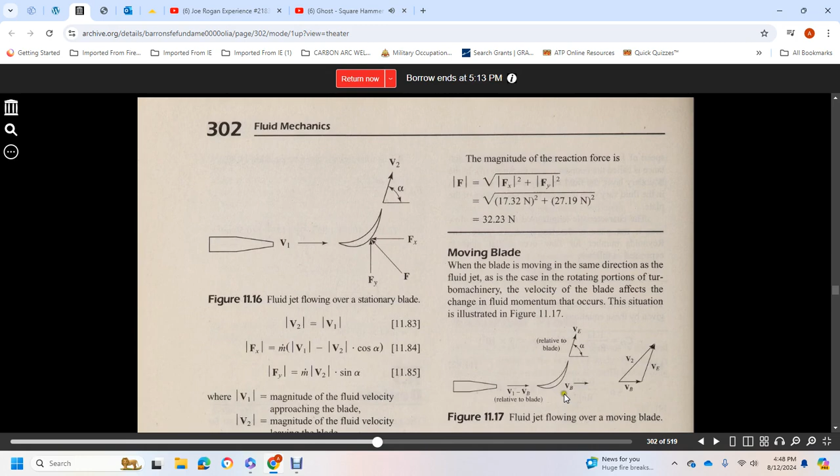And that shows the solution. Now, the moving blade moves in the same direction as the fluid jet and is capable of rotating portions of turbo machinery. The velocity of the blade affects the change of fluid momentum that occurs; the situation is shown in figure 11.17, with the fluid jet acting on the moving blade. The relationships between the velocities and forces of blades are given in the following equations.

Maximum power is related to 180 degrees; the turbine power is related to the mass flow rate and the fluid velocity by the equation. And then, examples.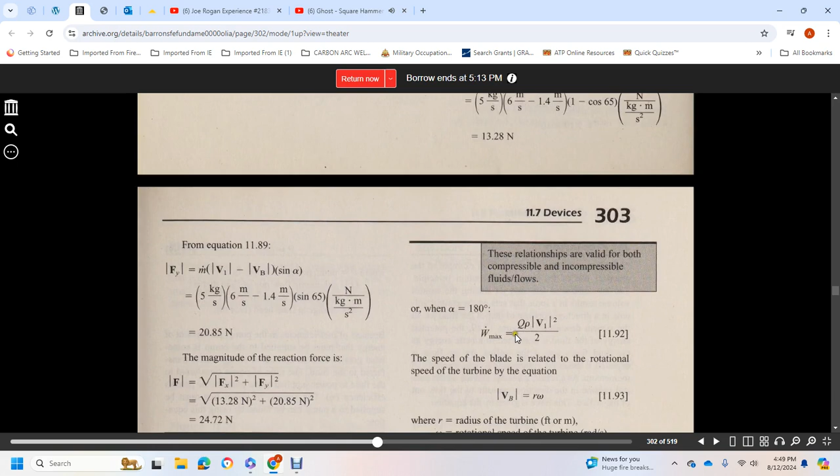These relations are valid for compressible and incompressible fluids, where angle alpha is 180 degrees. The speed of the blade is the rotational speed of the turbine, equal to VB, the radius of the turbine times the rotational speed of the turbine.

Now, jet propulsion: a fluid propulsion example using the impulse and momentum principle. The momentum of the fluid leaving the control volume results in a force acting on the control volume in the direction opposite the fluid jet, as described in figure 11.19.

Potential energy of the fluid is converted to kinetic energy as fluid flows out of an orifice; fluid is expelled and leaves the system with a certain amount of momentum. As a result, a force is exerted on the control volume in the direction opposite the flow out of the orifice.

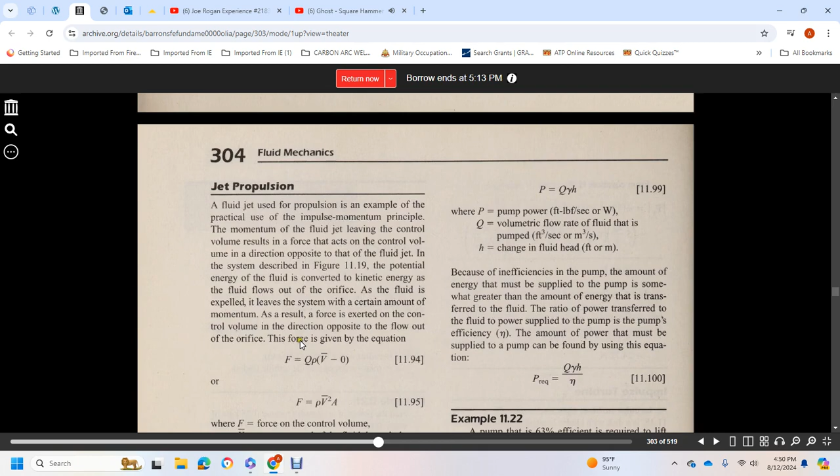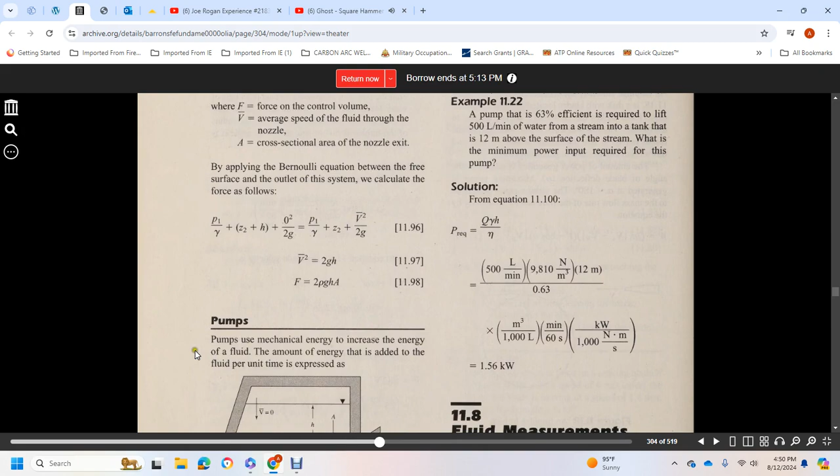Pumps use mechanical energy; they increase the energy of the flow. The amount of energy added to the fluid per unit of time is expressed as pump power P, equal to the volumetric flow rate times the specific weight times the change in head of the fluid.

Basically, the amount of energy supplied to the pump is greater than the amount of energy transferred by the pump. The ratio of the transferred fluid power to the pump power supplied is the pump efficiency.

The amount of power that must be supplied to the pump can be found with this equation: power required equals volumetric flow rate times specific weight times the change in fluid head, over eta (efficiency).

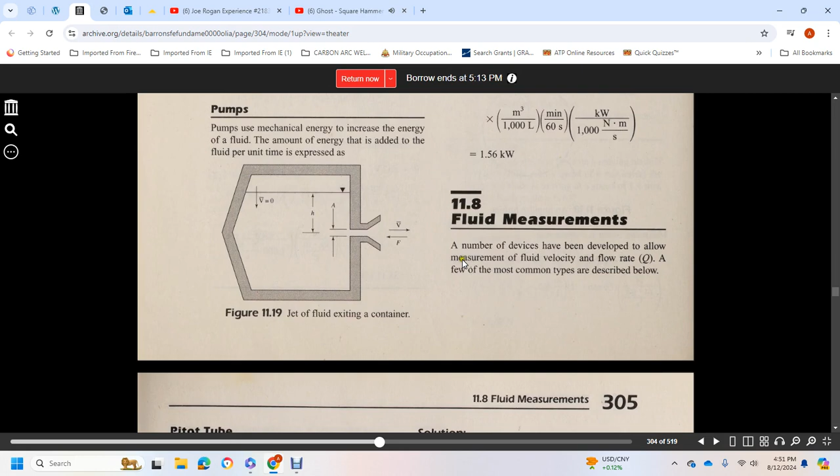Article 11.8, fluid measurements. A number of devices have been developed to allow for the measurement of fluid velocity and fluid flow rate. Let's take a moment to describe the most common types below.

A pitot tube measures the stagnation pressure of a moving fluid using a tube with a small diameter hole, with the end pointed directly into the fluid flow, as shown in figure 11.20.

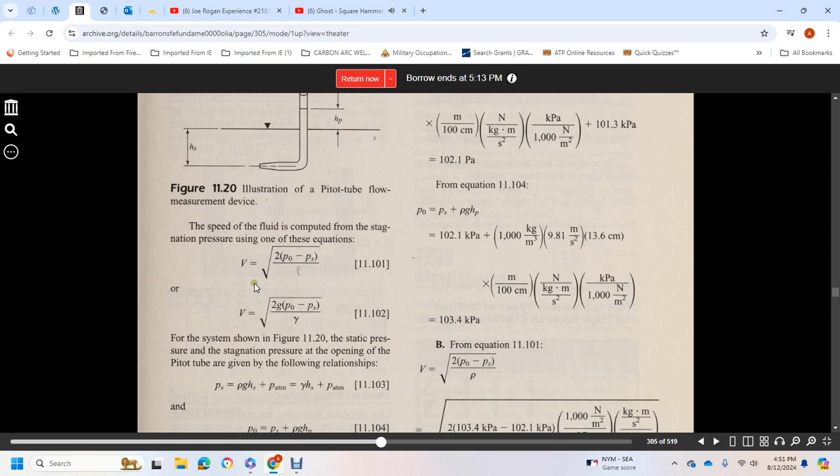The orifice flow meter is illustrated in figure 11.21. A flat plate with a small hole is centered in the pipe. Pressure measurements are taken at fixed locations upstream and downstream of the orifice, and the flow rate of the fluid is related to the difference between these upstream and downstream pressure measurements.

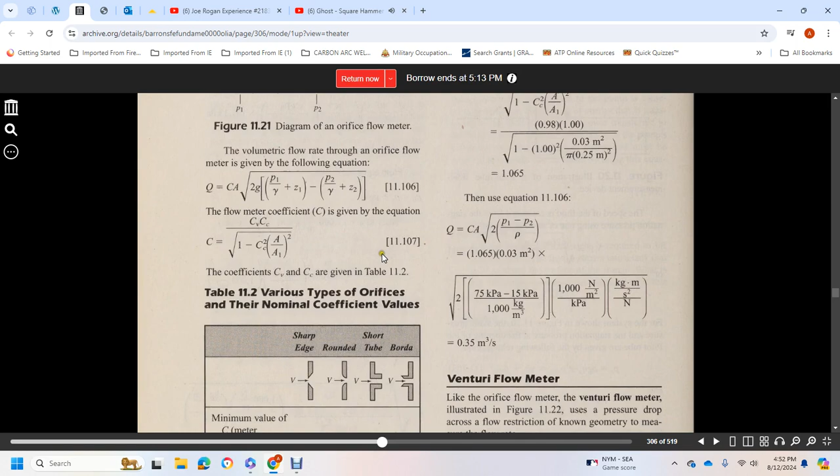The venturi flow meter is illustrated showing how the pressure drop across the flow restriction, along with the geometry, is used to measure flow rate. The volumetric flow rate for the venturi is given using an experimentally determined coefficient value, Cv. A venturi flow meter with a gradual contraction produces a much smaller head loss in the fluid stream, but the shape of the device is more complicated to manufacture than an orifice.

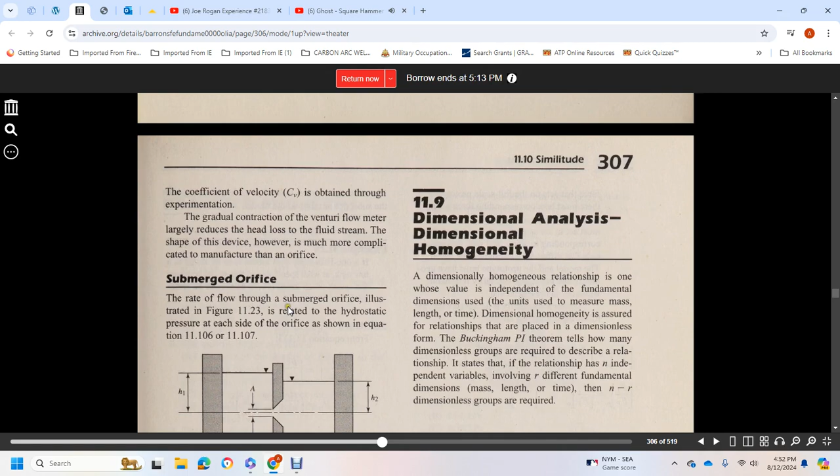A submerged orifice, with flow through a submerged orifice, is illustrated in figure 11.23 and relates to the hydrostatic pressure on each side of the orifice, as shown in equations 11.106 and 11.107.

For an orifice discharging into the atmosphere, the fluid discharge is illustrated in figure 11.24, with the atmospheric contribution shown in equations 11.108 and 11.109.

Neglecting losses, the flow rate is equal to the coefficient times the area times the square root of gravity times the head, accounting for head loss.

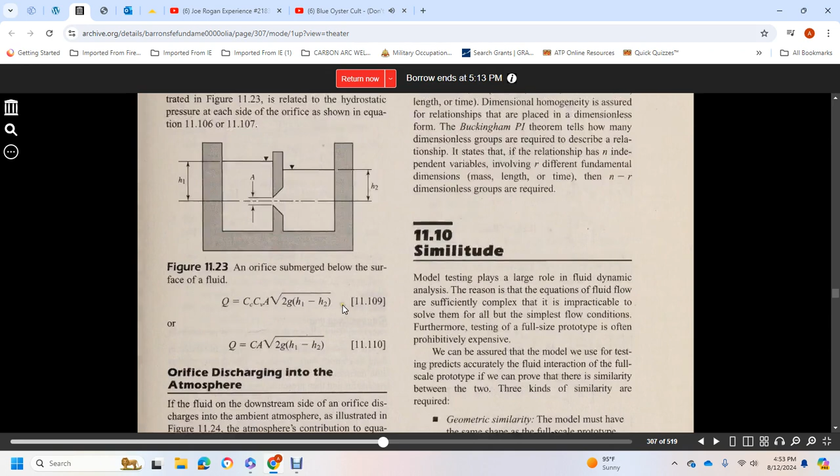Article 11.9, dimensional analysis and dimensional homogeneity. Dimensional homogeneity refers to a relationship whose value is independent of the fundamental dimension units of mass, length, and time.

Dimensional homogeneity is ensured through the use of the Buckingham Pi theorem, which tells us how many dimensionless groups are needed to describe a relationship. If a relationship has n independent variables involving r different fundamental dimensions of mass, length, and time, then n minus r dimensionless groups are required.

Article 11.10, similitude in model testing. Fluid dynamics is governed by equations of fluid flow that are sufficiently complex, making it impractical to solve them except for the simplest flow conditions. Furthermore, testing a full-scale prototype is often prohibitively expensive.

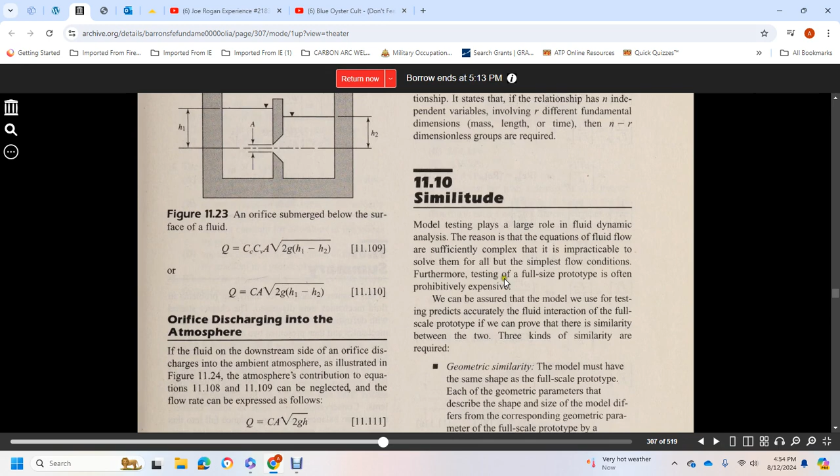To reliably use a model to predict the fluid interaction of a full-scale prototype, we must establish similarity between the two. Three kinds of similarity are required. Geometric similarity means the model must have the same shape as the full-scale prototype. Each geometric parameter describing the shape of the model differs from the corresponding geometric parameter of the full-scale prototype by a constant scale factor.

Kinematic similarity means the character of the fluid flow must be the same for the model and the full-scale prototype, including the direction of flow. Each fluid particle near the model must behave like the corresponding fluid particle at the corresponding location near the full-scale prototype, and the velocities of the two corresponding fluid particles must be related by a constant scale factor.

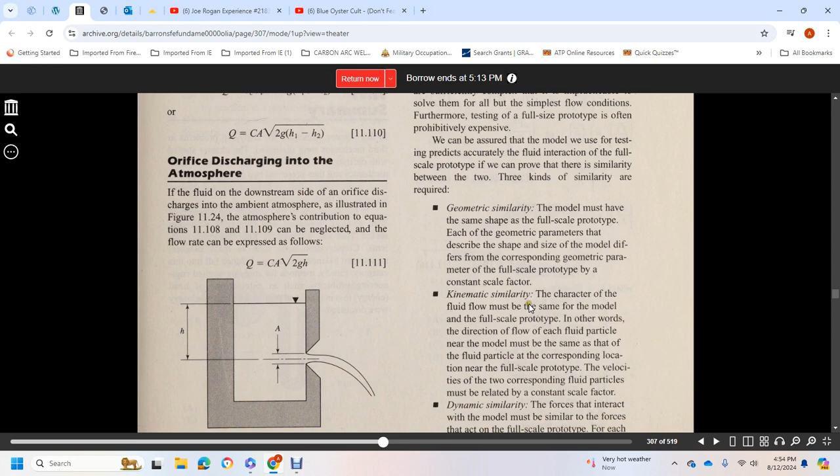Dynamic similarity means the forces acting on the model must be similar to the forces acting on the full-scale prototype. For each force acting on the full-scale prototype, there must be a corresponding force acting on the model in the same direction at the corresponding location, with magnitudes differing by a constant scale factor. The model and prototype must also have geometric and kinematic similarity.

Dynamic similarity is achieved under the following conditions, using subscript P for the full-scale prototype and subscript M for the model.

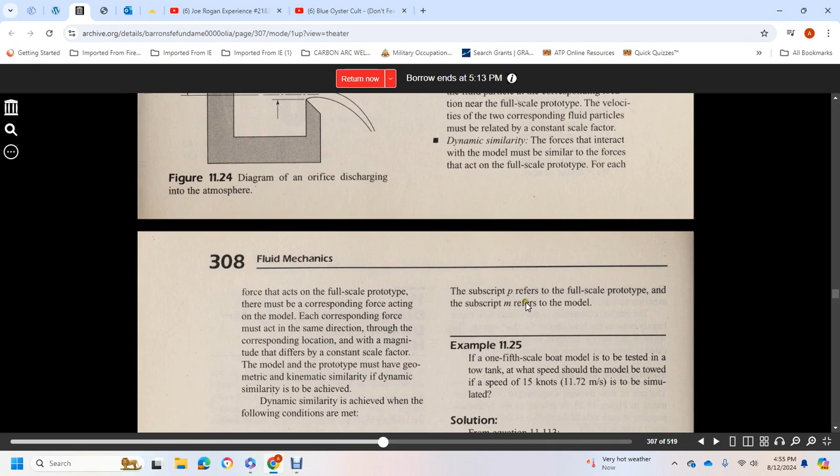Section 11 summary. In this chapter, we discussed the principles of analyzing problems in fluid mechanics. The chapter started with the fundamental definitions of fluid mechanics, presenting two categories of problems: hydrostatics, the study of fluids at rest, and dynamics, the study of fluids in motion.

The discussion of hydrostatics covered concepts of fluid pressure, buoyancy, and barometry. This was followed by fluid dynamics problems involving conservation laws: mass balance, momentum balance, and energy balance. Finally, methods applied to engineering problems, such as calculating head and energy loss in pipes and analyzing turbomachinery, were discussed.

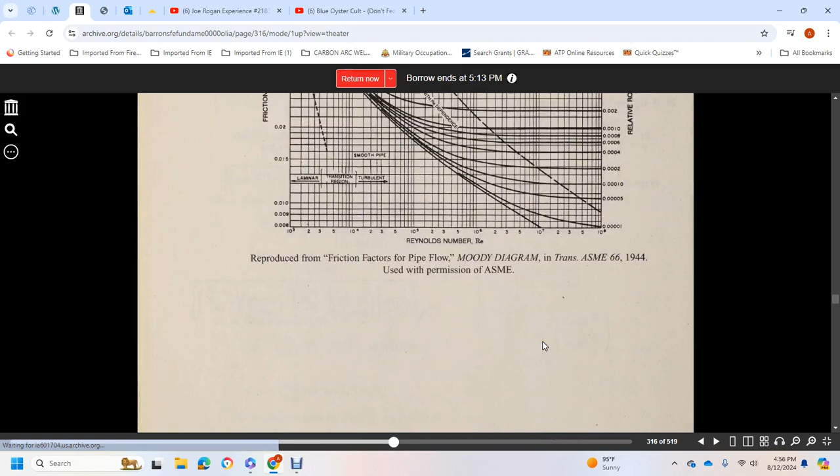Chapter 12, Electricity and Magnetism.